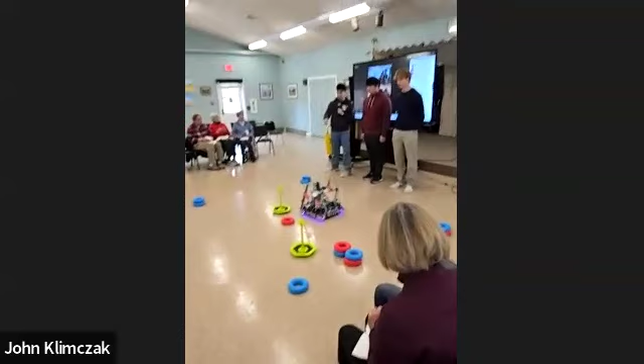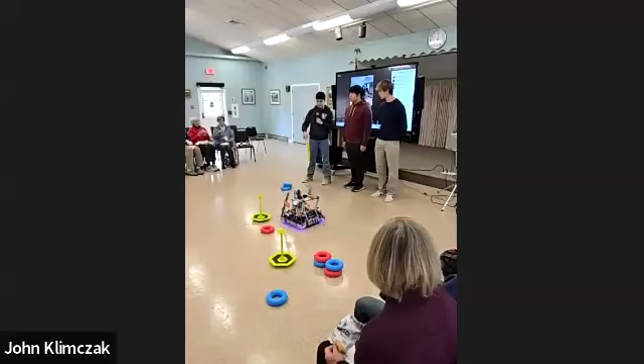The field is a 12-foot by 12-foot field with 4 corners within a square, and each corner is either a positive or a negative corner. And if you take a goal that has 2 rings on it...

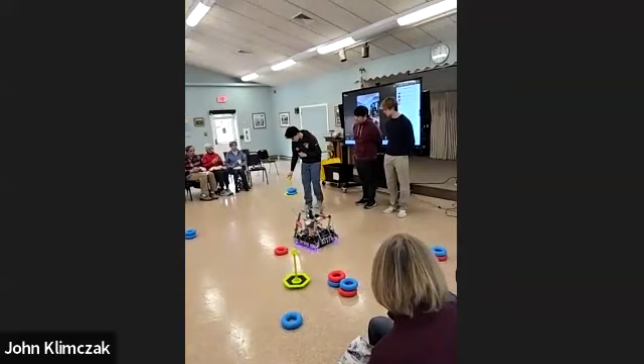And you put 2 rings on it, and you put it in a negative corner, it'll subtract 2 points from the other team's score.

But if you were to put it in the positive corner, which would be over in this corner, then it would double the score of those rings for your team.

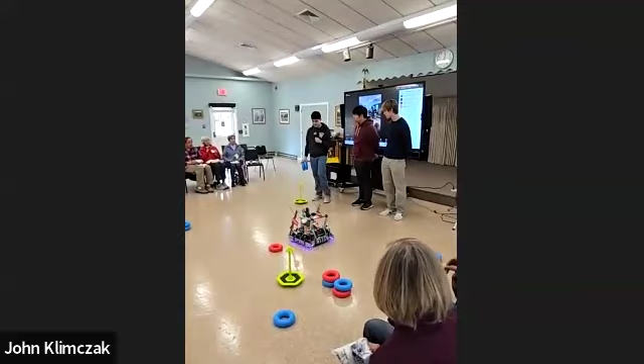So last year the game was called Over Under. Each year there's a new name for the game as well. This year it's called High Stakes, because at the end of the game you can climb on the scaffolding in the middle of the field.

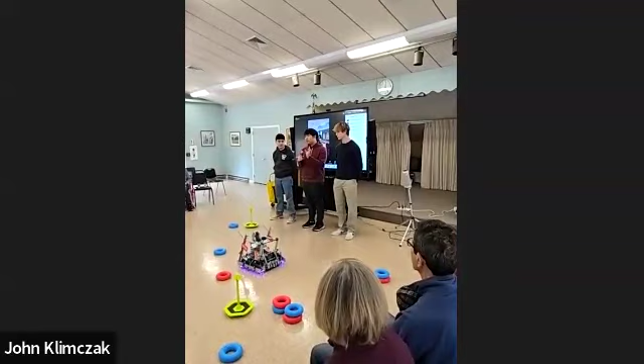So crowd control, it sounds like it's just... in the first 15 seconds, the game is programmed autonomously to go over here at the edge of the corner, trying to score as many rings as you can.

There are 2 points for having the team's robot positioned correctly during that period.

Okay, so the whole name of the game is just to score rings on your stake so that you win. So how the game works is you have 2 minutes total.

You start off with, as Anthony said, 15 seconds of autonomous, and then a minute 45 of driver control. But initially it was set up so that you had a minute 30 where you can stack rings onto your stakes and then put them into the positive corners, which would double the points.

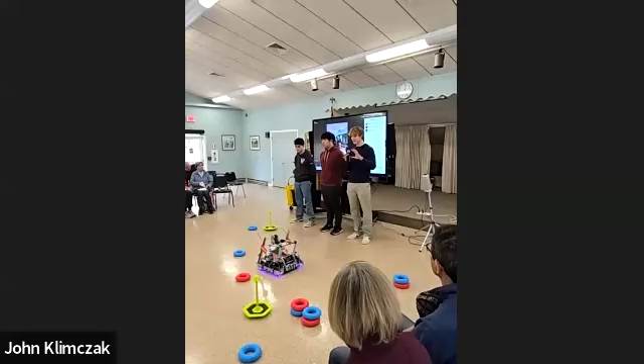So what teams would do is stack rings as fast as they can and then put their stake in the positive corner, and just hold it there so that when the minute 30 was up, they would have double points on that stake.

So Vex realized this. They realized the game was kind of boring since people would just sit in their corners and no one's moving around—not fun, not a lot of strategy. They changed it so that these positive corners are protected for the last 30 seconds.

That gives teams about a minute 15 to stack rings, get them in the corner, and then hold that corner, not letting anyone take their stake out. Then for the last 30 seconds, they can try to take the other team's rings off the stake and put them in the negative corners.

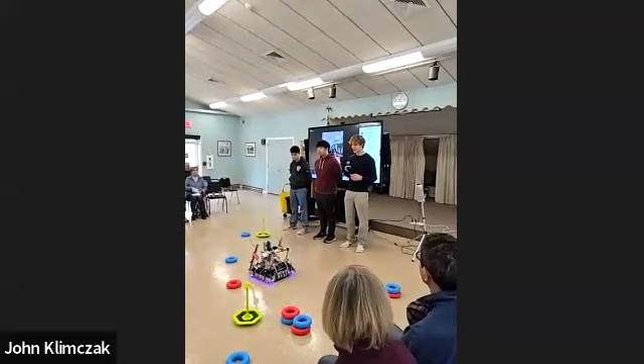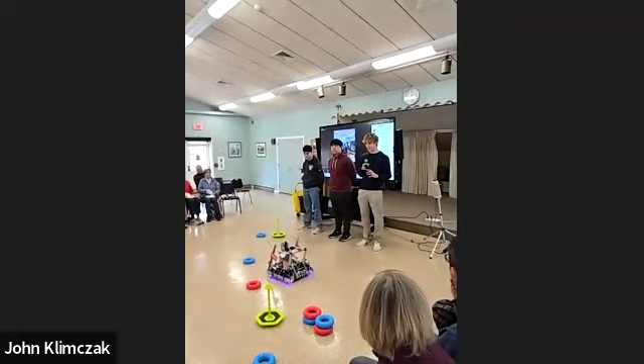That made the game a lot more lucrative, a lot more open for different ideas. A lot of teams would just stack rings as fast as they could, get them to the corners. Then when time is up, they would either try to stack any rings on the stakes, leave them in the field, or stack their opponent's rings in the corner, which racks up points.

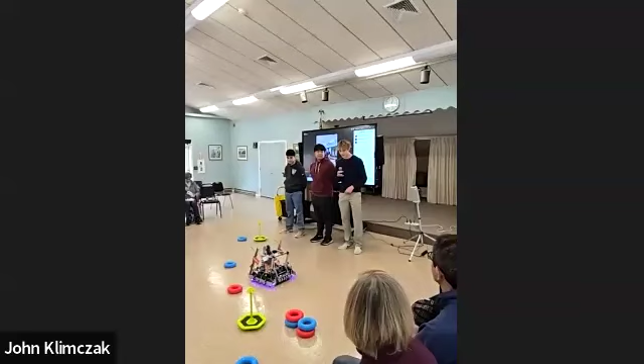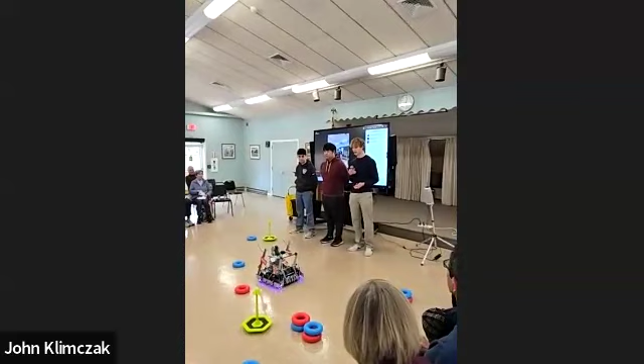Another tip: there's a large ladder in the middle that has 3 different levels. The third level is the highest, the first level is the lowest. I feel like that's supposed to be the target of the game, but you realize the technology and weight your robot needs to take on the high hang is too much. It was much more efficient and easier to just stack for points that way, so the hang wasn't really that big a component.

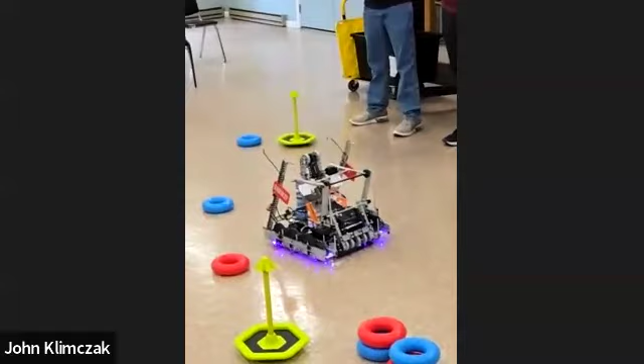We talked about the robot—you can't just build everything. Your robot is limited to 88 total watts. For motors, we typically use 11-watt motors, which are a little larger, and we also have 5.5-watt motors. If you use just 11-watt motors, you can put 8 on your robot. If you use only 5.5-watt motors, you can put 16 on. But since the 5.5-watt motors are half the power, they're a lot weaker.

So what we decided to do is use 66 of our total watts just on the drivetrain, on our wheels. That gave us a really speedy, quick, and efficient moving robot, and then we dedicated the rest of our wattage to the intake here.

This is our conveyor belt intake. It's on a chain, and attached to the chain are these standoffs—pieces of plastic used to hook onto the ring. This allows us to carry the ring up the robot onto a goal. When the goal is attached, it'll swing it and flip it over.

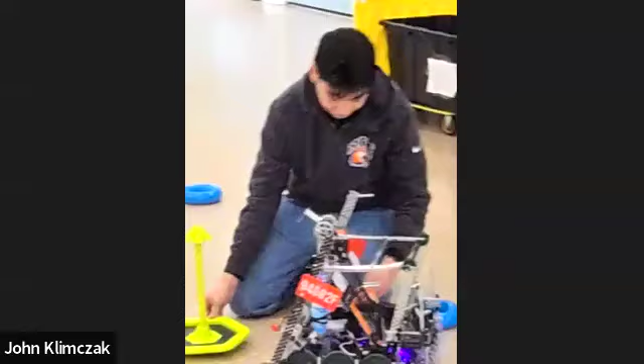The way we attach or clamp onto the goal is by using this clamp right here. This clamp is activated by a pneumatic piston underneath, you can see the thread here. The solenoid is right here on the robot, and this is our pressure gauge, this is our air tank, which we decorated with a livestock design.

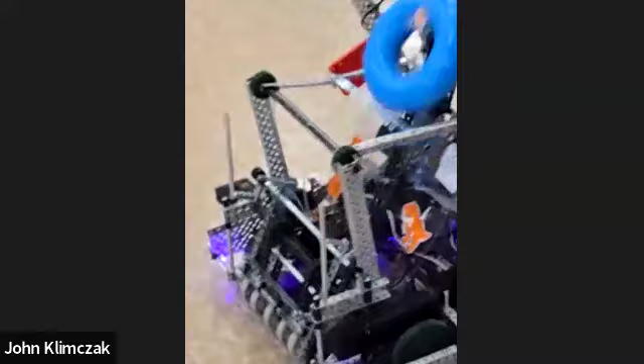The second aspect of this is our intake, which are these rubber rollers right here. This swings down—it's called a passive intake—so it just hangs down.

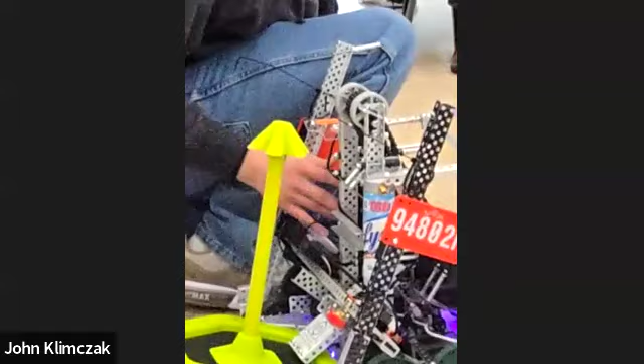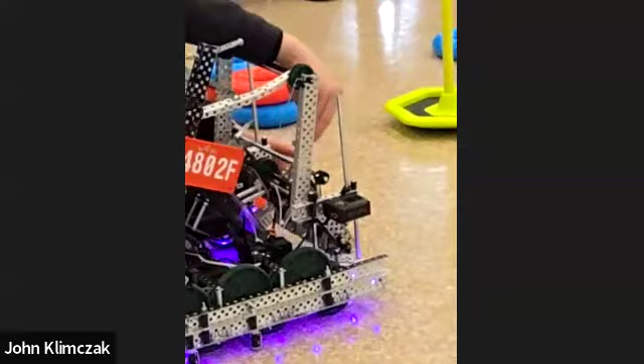The way it's activated: normally it would be out of the 18-inch size limit we have to stay within. So when we start the game, we back up for autonomous, which causes it to fall down, and this lever slides down, meaning it can't go past this point anymore. It's sort of a one-way release—it can go down but can't go back up because of this release. We added that because when it went past this point and all the way up while taking in the ring, it wouldn't pick it up effectively. So the conveyor belt and our intake are attached to the same button.

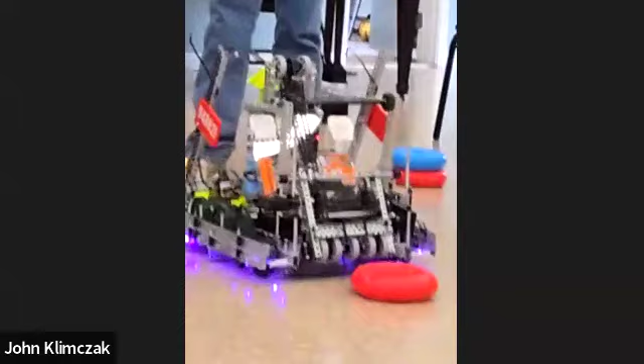Normally we'd be on the upper tier.

Then what we can do is, now that we've scored rings, we can bring it over to the corner and let go of it in the corner.

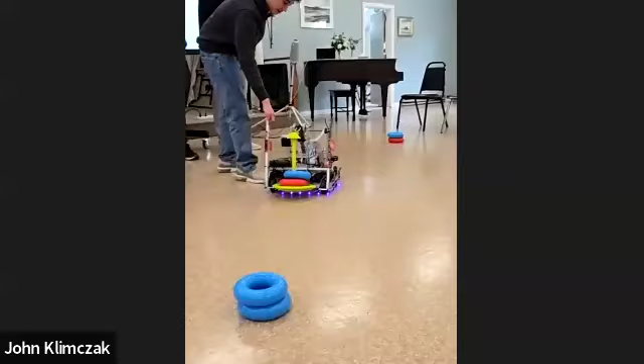During the game, you have to change your strategy. So while we were at state, we realized our robot was being slowed down because of the weight. It was pretty heavy, so we had to remove one of the main parts of our robot, which was the scoring arm.

So on the field, on the perimeters, there are these larger ones that require a little bit more effort to score because they're standing up and much higher than the lower ones. So before we took it off, we had an arm that would...

Normally it would pass through and onto the goal. But when we lifted it up the tiniest bit, it would slide in and get caught between these two pieces of plexiglass, and have this arm move up all the way from this position onto this ring. Then we could have it go back down below the position where it wouldn't get caught underneath.

Here's the question: on the field, at one time there are 4 robots. So, do you want to talk about alliances?

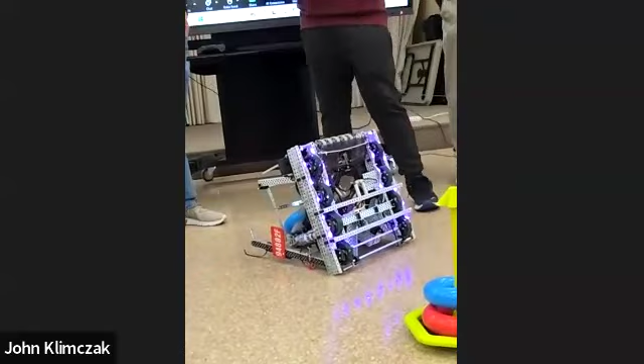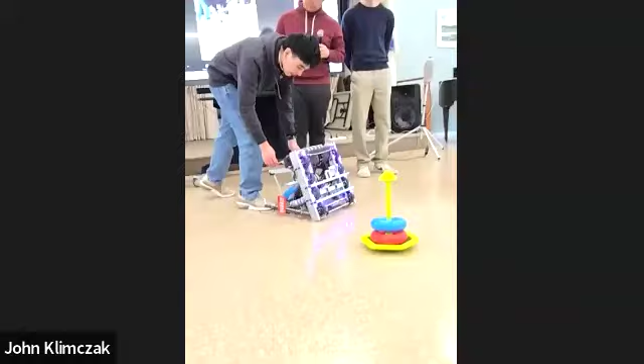The reason why we wanted 6 motors is because they're easier to make smooth. So what we did was we first typed out the code so we can manipulate each motor individually, and then we transferred all that to the block code. I don't know about other devices, but it's a very valid approach, and the 6-motor drivetrain has been very helpful because it allows us to be more competitive since we're driving faster.

We can push other robots out of the way.

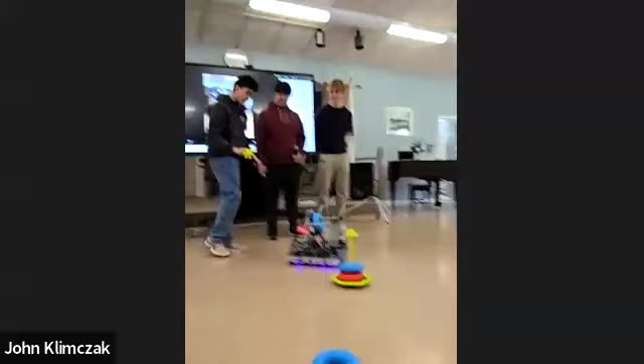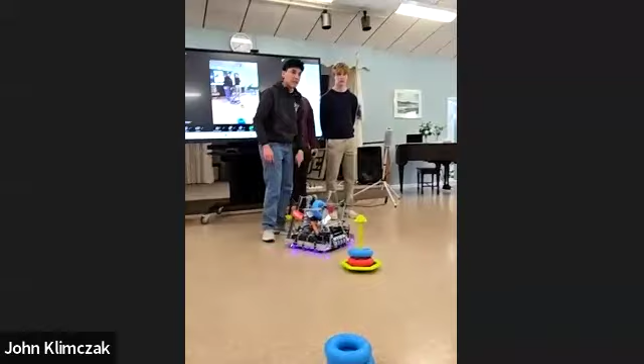And it gives us enough power to use these hooks right here, because during the game, our robot had already used up all of our 8 motors. We didn't have any additional motors to spare, so we're trying to figure out a way to climb without using additional motors. The way we decided was to go for a passive climb, which doesn't require any active movement.

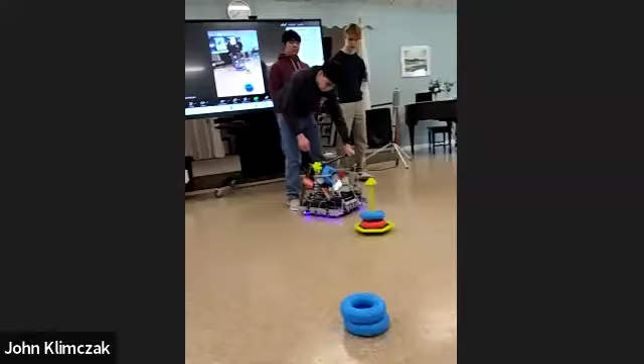We just drove into the middle scaffolding, and it's a bit wider than this. And these ends of the screws are barbed, and they would allow us to ride up onto the bar. Then we found the center of gravity, so it would stay perfectly balanced on there.

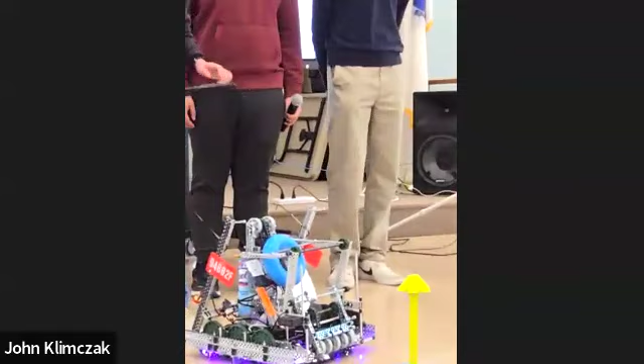And we had a couple of matches where it was close, and they slid a piece of paper underneath their robot and determined that it was hanging. Literally this far off the ground, very close, but we're very, very consistent.

How familiar are you with the game requirements when building? So actually, one of the first parts of the design process is reading the manual and seeing the rules for this year's games, what restrictions you have. That allows you to think more clearly about how you're gonna go about designing your robot and what you can and can't do.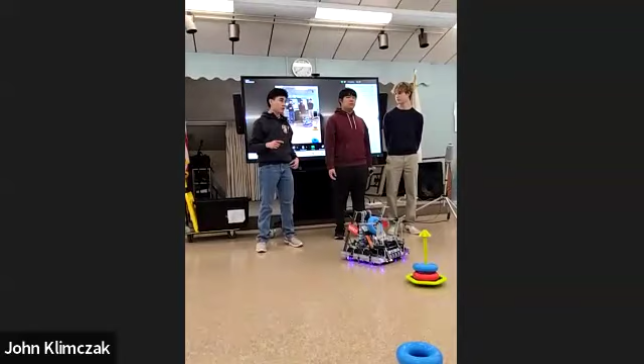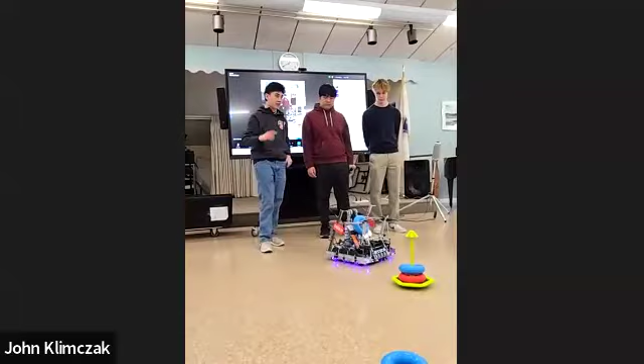Each year, they release the game in May at the end of the world competition, and then there's also a game manual that is released as well. That's like a 100+ page PDF full of the rules. It's good to know that, because in games, if you want to challenge a rule or a decision, you can quote rules, and sometimes that can help overturn a decision.

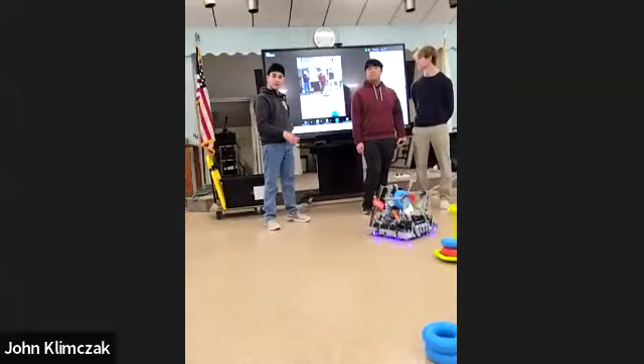You think we could show a match on the video? Sure, we could do that. That would be great. I have one other question though, because you compete with all different schools in Massachusetts.

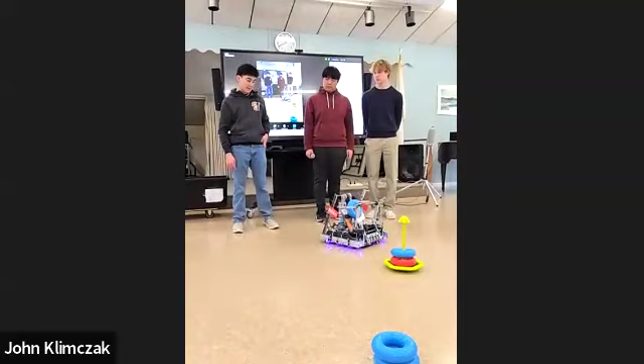Can you just talk to the economies of scale and size differentials? Because we're a small group, but you're on a level playing field because of the regulations that are put in place. While some schools may have a higher budget and more access to materials, the way these robots are designed allows teams that don't have as large a budget to still remain competitive, because of the standardized parts that it has.

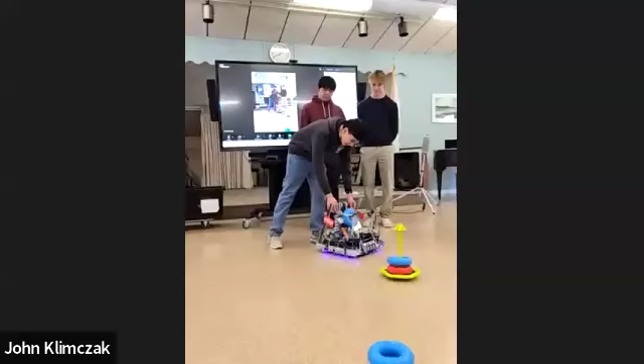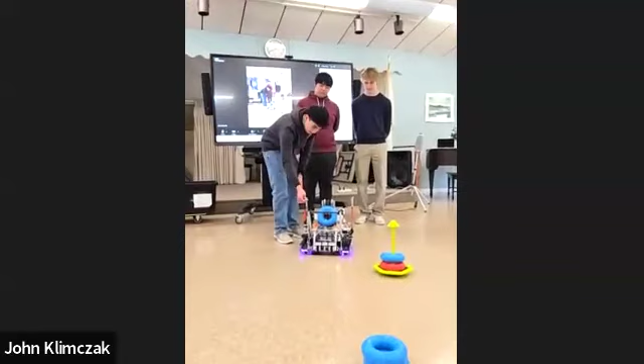For example, you probably have noticed this, but the robot is full of these little metal bars with square holes on them. That's the standardized building blocks of the robot. And all these screws come in like 7 different sizes. These flex wheels come in a couple different sizes. So there's a lot of parts, but they all come in certain sizes that you are forced to use.

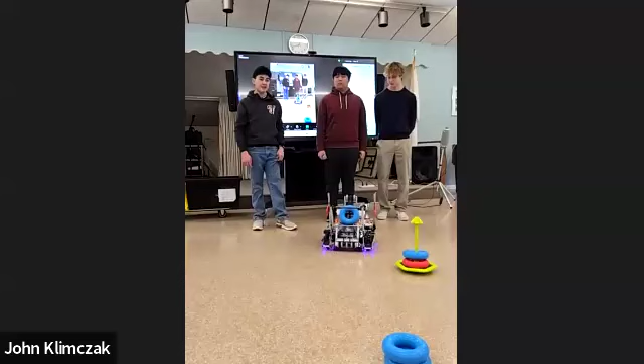And the only non-Vex parts, or the only materials you can use that are not produced by that company, are plexiglass. Even though you have to use a certain thickness, a certain consistency, you can only use the amount that's on a 2 foot by 1 foot sheet. And all the parts that you cut out and put on your robot have to fit inside that 2 feet by 1 foot sheet.

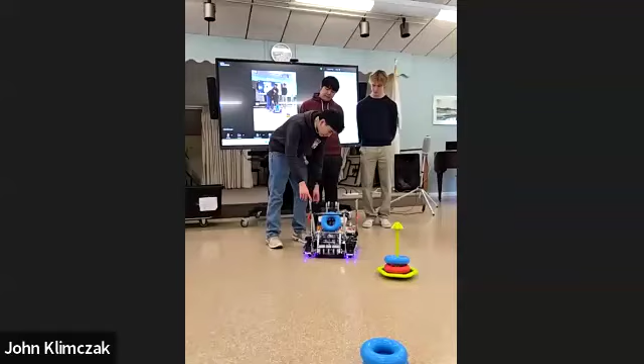And you can also use non-functional decoration on your robot, which is why we use Lysol cans here. Like the Lysol cans, yeah.

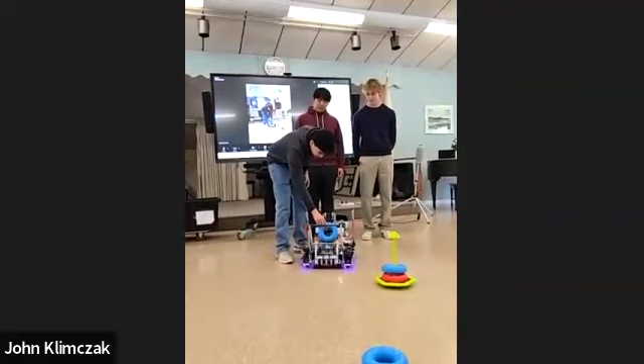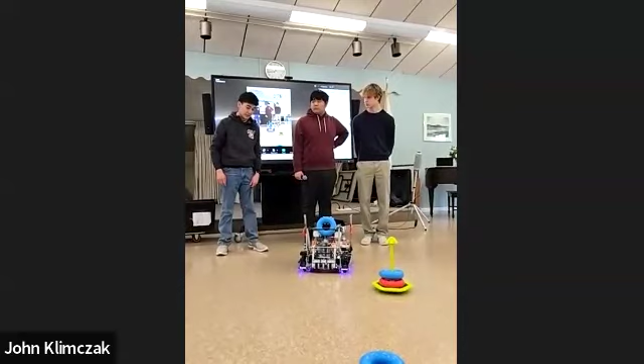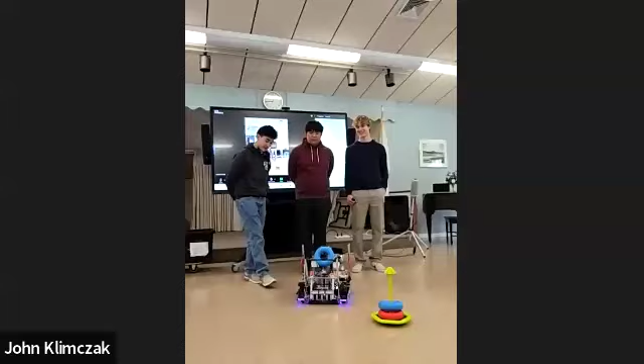But it's difficult sometimes, because some schools have access to workshops where they can go in anytime during the weekend and over the summer to work on their robots. They have unlimited supplies, unlimited funding. You normally see very good teams come out of more wealthy communities, like Lexington. Lexington has super teams that are very, very good. They're known for being great.

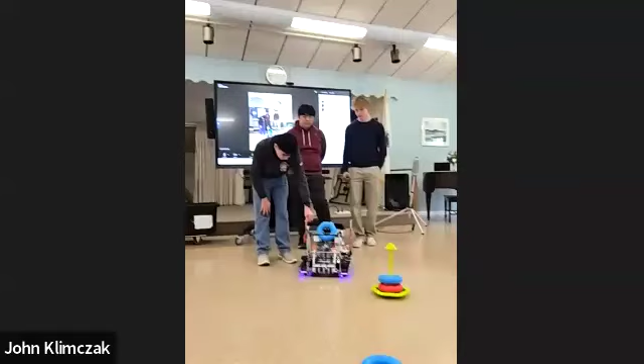And yeah, so we are using some outdated parts on this robot. That's like an aspect of it that doesn't allow you to be quite as competitive. If you work hard, you can make it up in skill somewhat, but to a certain degree, yeah.

Are you allowed to print your own parts? No, you can only use the parts that Vex creates.

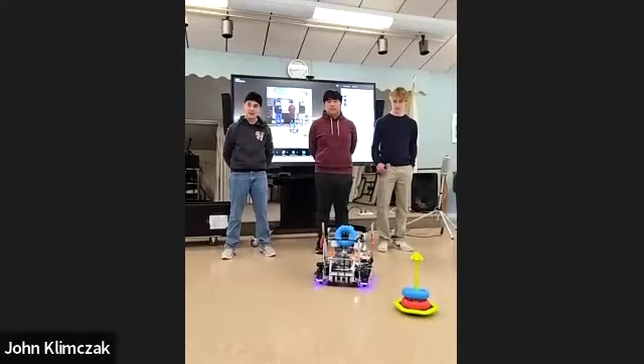To kind of what Alex was saying, large schools, local schools, and schools close to Boston have a lot of funding and a lot of experience in the robotics field.

There's also another part of the competition that's not part of the tournament, but it's another way to qualify: skills. It's a minute of autonomous driving and control, where you're just trying to score as many rings on stakes as possible. It doesn't matter what color, you're just trying to score points, and you're the only team on the field, so it's all about you and what you can do.

But then there's also a minute of autonomous, which is a lot more than the 15 seconds you get in tournaments. That means you have to code a minute's worth of your robot driving and scoring as much as possible, which is very hard to do without GPS sensors or vision sensors that make it easier to detect obstacles and navigate around them. Whereas we just have to code every little turn and move and make sure it works well enough, as many times as possible that we can actually run it in a skills match.

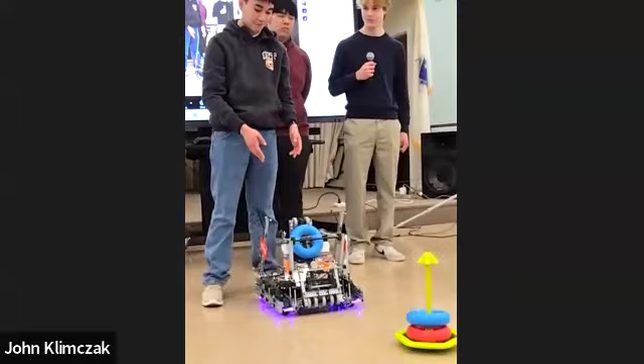As Tim was saying, we don't have the material to make it do those advanced sensor things and know exactly where it is on the field. So a lot of our autonomous is just trial and error, unfortunately. We have to move forward one inch, turn 90 degrees left, and map out every tiny little step for the tiniest bit of movement, which can be a little challenging at times.

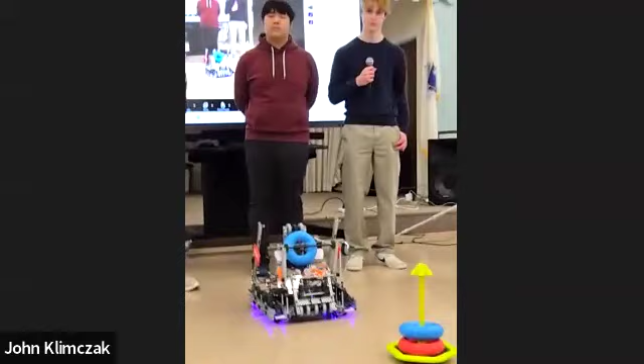Well, I had the opportunity to see one of these competitions, and I was amazed because the setup is a lot more standardized than it is in this room. But it was impeccable how you went up and did everything, and we were cheering. It was great.

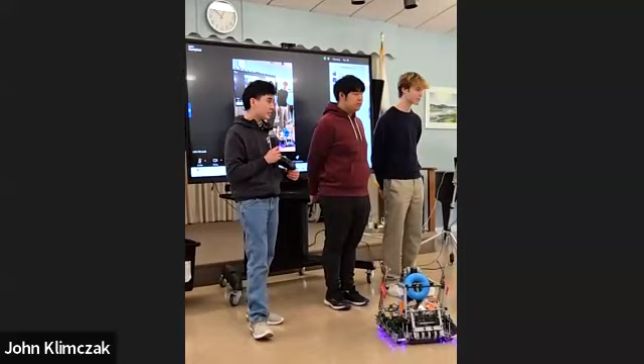Are you guys able to see the competition over these events, so you know what you're up against? You get to see that? So we can do a little bit of scouting. There's a Vex app that tells you how many awards a team has won, what matches they've played, what their score has been. But that can be difficult at times, because if you're from the Cape and ranked really well, that would just be an indication of how you're playing teams on Cape Cod.

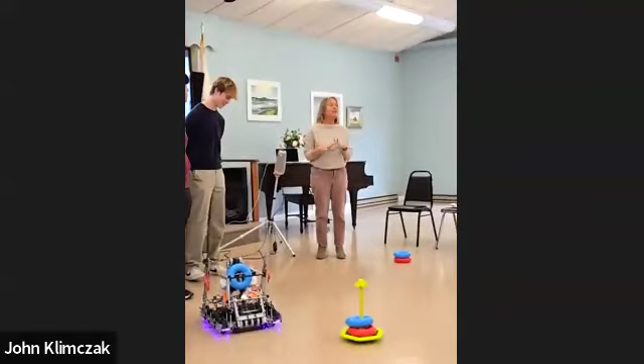And I'll say something - I know we keep saying Lexington, but if any of your children or grandchildren have played like club soccer where you pay money, we're playing against those teams as well, where it's an after-school club, not necessarily coming out of the public high school. So what's happening is they're taking children from the towns that are interested, getting some engineers, you pay a hefty fee, and then they compete as well. So just so you know, it's not just public high school. I'm not making excuses, because these guys do a great job - and they have a big trophy case to prove it.

If we could talk about your future and your plans after high school, is that a fair question? Oh, yes.

Sure, I'm going to Brown University with a major in computer science and a minor in bioinformatics. I just want to go into the programming field, to become a software engineer or see what options open up when I'm at Brown.

I am committed to UPenn, University of Pennsylvania. I'm currently debating between electrical and computer engineering, but I'm not totally set. My passion is mathematics, so I kind of want to find a major or find a skill where I can apply mathematics in the real world.

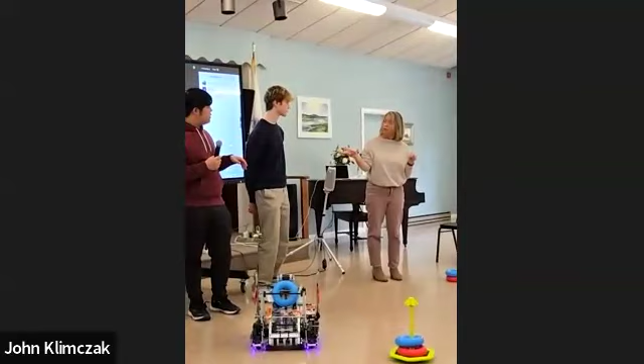We hosted a league, which is a 4-day tournament, at Nauset. We'll definitely share that date for next year, so you can come see. We attended Mashpee, we attended Monomoy - 6 days of competition. Wow. Oh wait, states - so that was 2 more. Yes.

I was at one of those competitions and I was amazed at the camaraderie, respect and admiration of each of the teams. It's competitive, but they're not trying to kill each other. They're working together, especially when they have to reset the board, meeting new people and working really well together. It was an amazing experience for me.

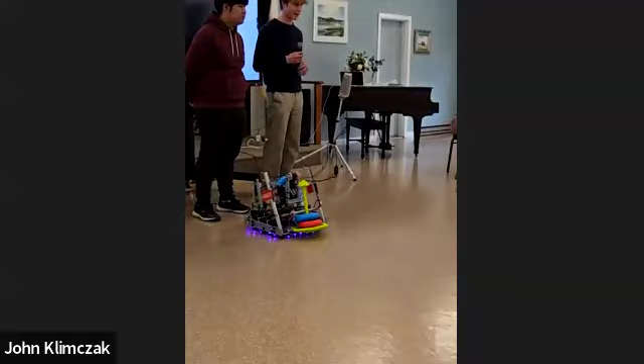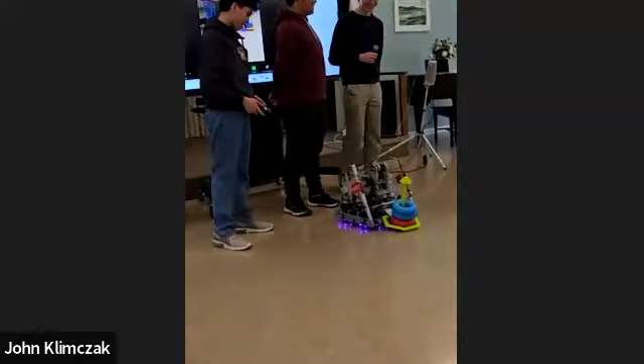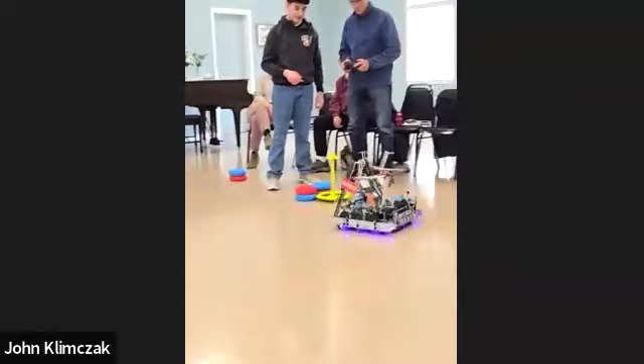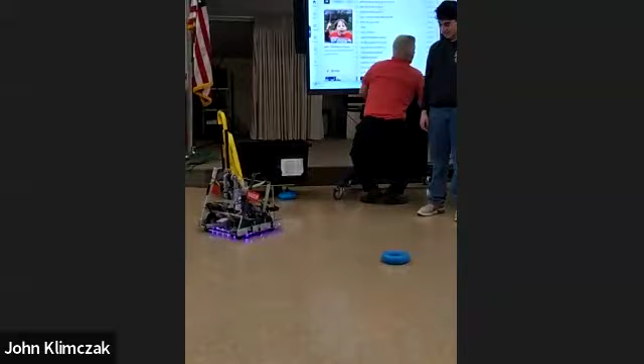Yeah, go ahead. There must be people online, people at home that are looking at that. Yeah. Try to overlay it. Okay.

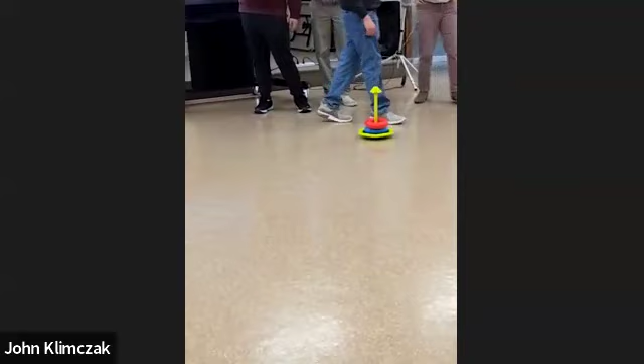What I love about building teams for this is it's the coder, the builder, the designer, the person that just likes that, and to keep notes in a notebook, so it puts an art in. And you'll see this is the team's YouTube channel. Some teams even hand out their business cards when it's time to talk about their alliance partnership. So it really lends itself to all this skill set.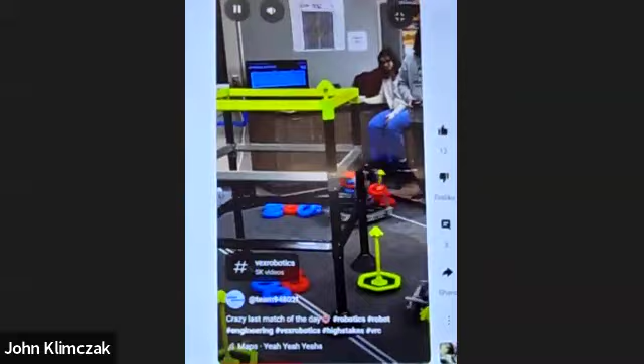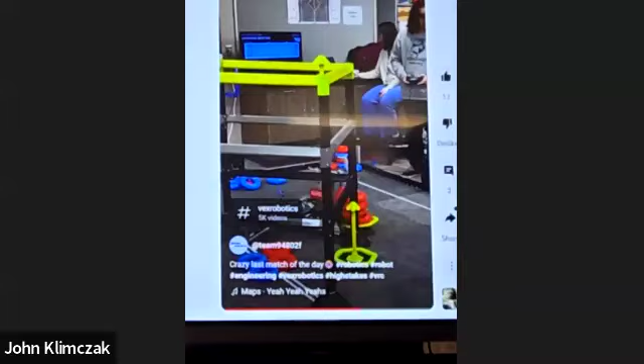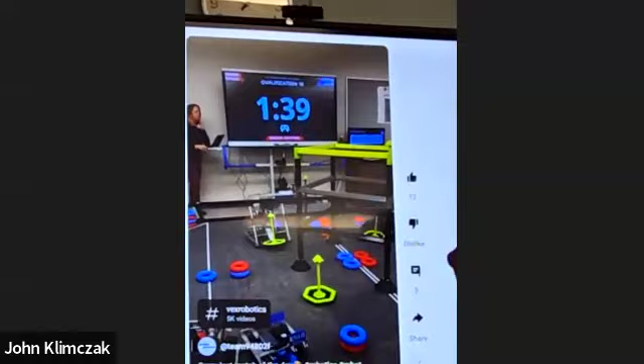This is just a speed test of our robot, we put a camera on it. So this event went very fast. This is before we added all of this stuff on top, it was just this layer on the bottom. It was very fast, yeah. Without the, it's hard, but...

Here, Alex, try lifting it. You just hit X.

Must be like the robotic vacuums. You have a weight limit for the robot for the rule. No, there's no weight limit. We don't try to balance it, so it doesn't. This was part of the robot design process, making new iterations. So this was a simpler, earlier design we made.

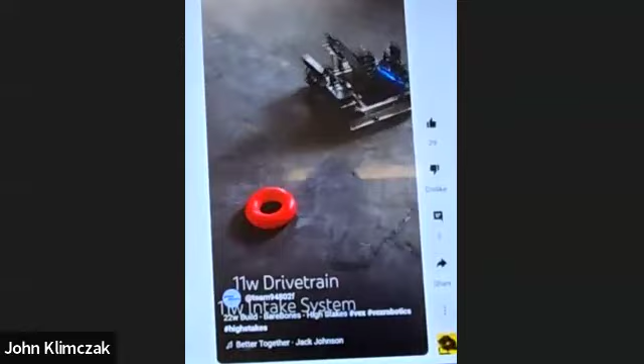It was much slower. This is before we got our field, because sometimes it's harder for us to acquire materials. That was something we built.

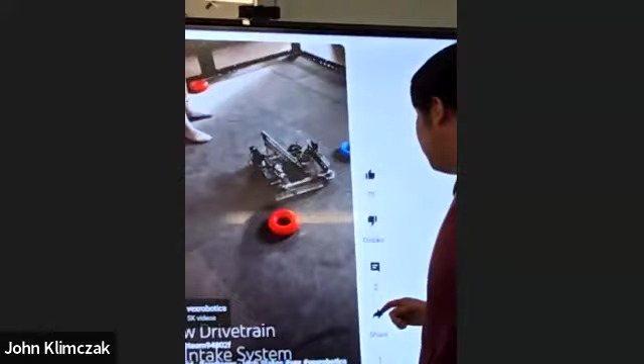One of the comments from Judith on the Zoom: it's just like the automated vacuum cleaners, like Roomba. Yeah, and I just saw one that has a claw that can come out and pick up pieces of paper and shoes out of the way.

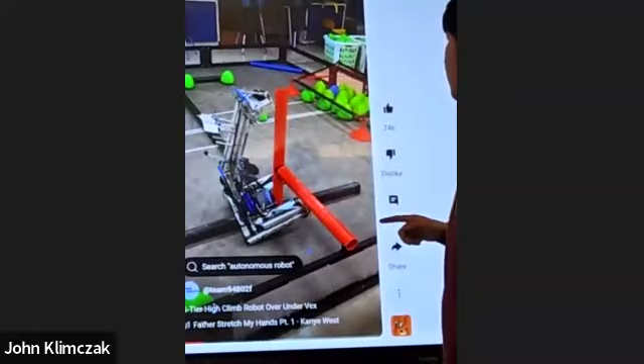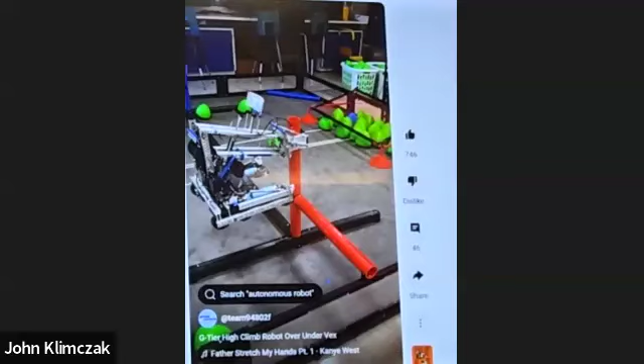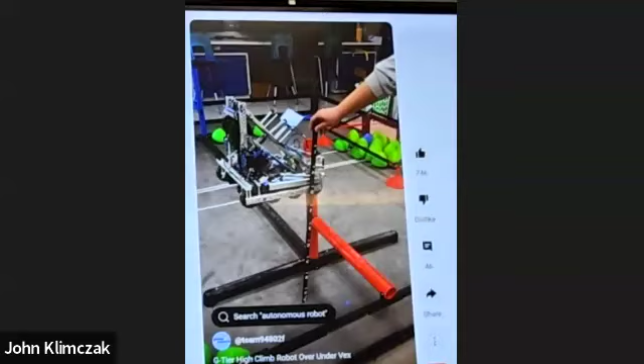This is our last year. And Oh, big wow. Whoa, yeah. Huh. Oh, my goodness. Yeah, all right. Woo! Oh, State tournament. Oh, my God. I'll tell you, that is amazing. Oh, here it comes again. Oh,